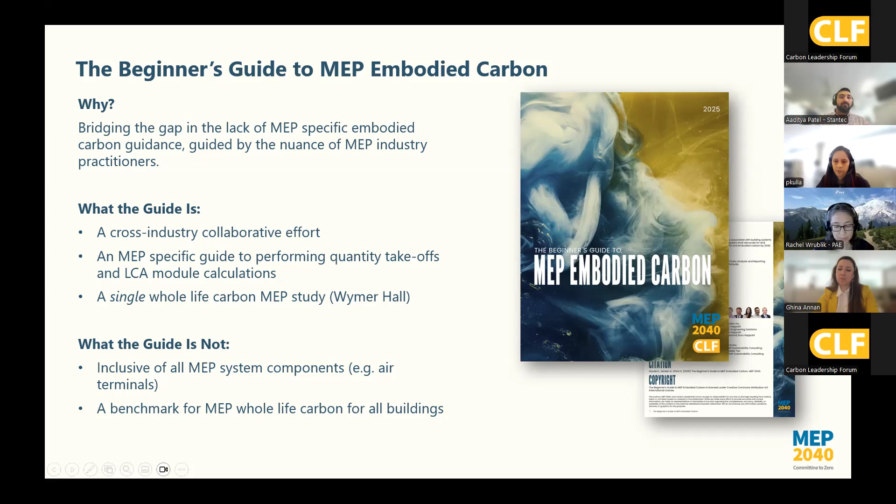Okay, so I'm going to go through the guide briefly on a high level. You can see here all the categories that were included, and then some of the specific pages for those categories. On each of those, we list some of the exclusions. We were really trying to get to that 80-20 to tackle the most important big things that we could.

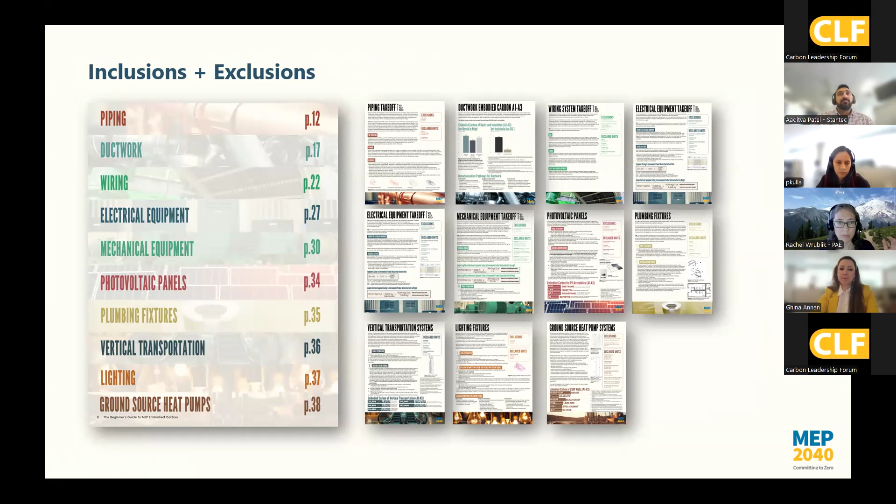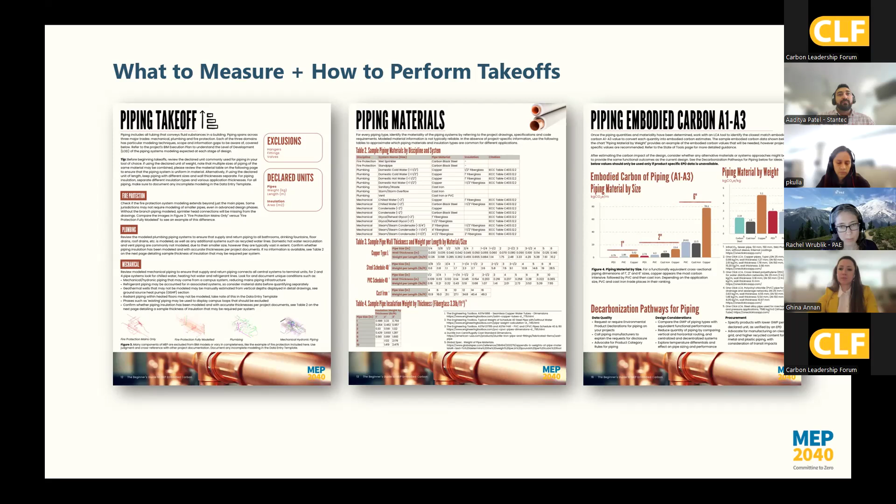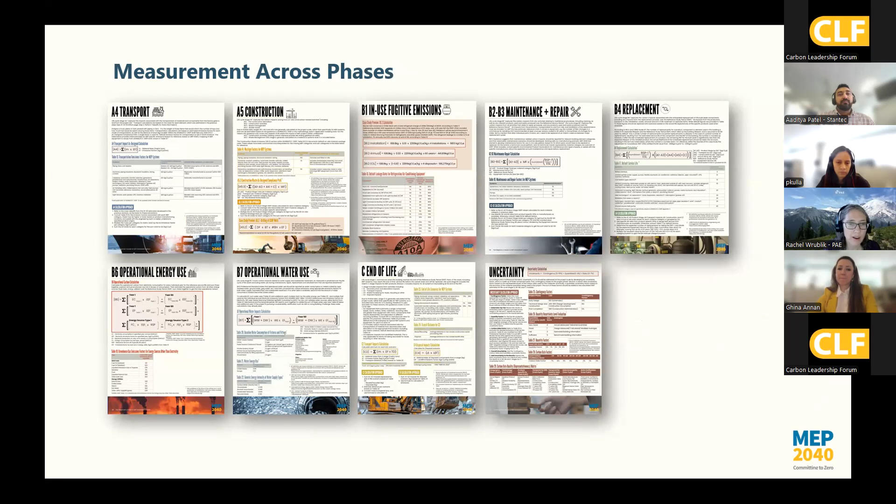And then within the guide, you can see that there is guidance around how to handle the takeoffs, mainly from Revit, and then assign them actual materials and embodied carbon data and handle those calculations. We also go through across the phases and give specific guidance on how to handle each of these. There are some specific exclusions, which are also listed. And then we have our uncertainty calcs at the end.

And as I said, we have one case study that was included in the guide. So here's a high-level picture of what we found out of that Wymer Hall study. When we looked at cradle-to-gate upfront carbon, we saw that MEP accounted for more than a quarter of the emissions, which was much higher than a lot of the initial estimates had been. So this is a little surprising.

When we look at whole life embodied carbon specifically, we see that MEP jumps up to over 50% in this particular case. This is once we're including replacements and fugitive emissions. And then the graph at the far right looks at the entire whole life carbon picture, which includes operational energy and water emissions. And if we lump that into MEP, then we see that it's almost 3/4 of the emissions. So very significant, and it really spoke to us in terms of the need to do something about this and get more data.

Within the guide, there's a number of insight pages. We look at the EPDs that are missing from the industry. We really have a lack of carbon data in MEP. There are call-to-action pages for 4 different audiences. And then we look at the comparative impact of MEP materials, which I want to zoom into here.

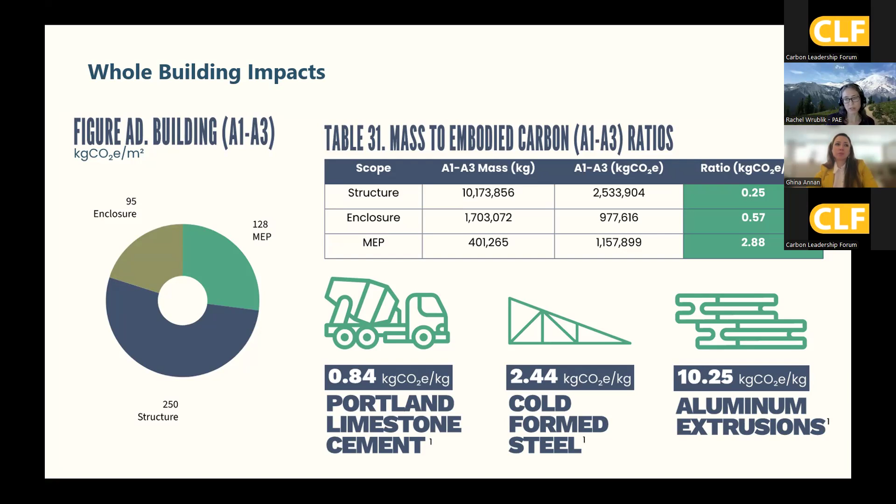And then you can see at the bottom an example of that. The ratio on the right is kind of an average. But if we look at steel or aluminum, these are things that are featured often in MEP, and it shows just how important those material selections can be in overall impacts.

We also talk about environmental product declarations. There's definitely a lack of those in MEP, but that is changing. We're seeing more and more of them. And one thing we saw looking at the whole life carbon picture is that for the case study, we were using more than 60 EPDs to cover MEP systems, which is much more than structure, needing about 5, and envelope, less than 15. So this speaks to the complexity of the systems. There are a lot of nuances to it, and really the importance of trying to get more embodied carbon data.

So we also launched the whole life carbon pilot while the guide was under review. We recognized the void of MEP embodied carbon takeoffs in the industry, and thus embodied carbon data. And so this was a cross-industry collaborative effort by 27 companies. We got 20 individual project studies across varying typologies. And this was a great proving ground for the guide and the methodologies within it.

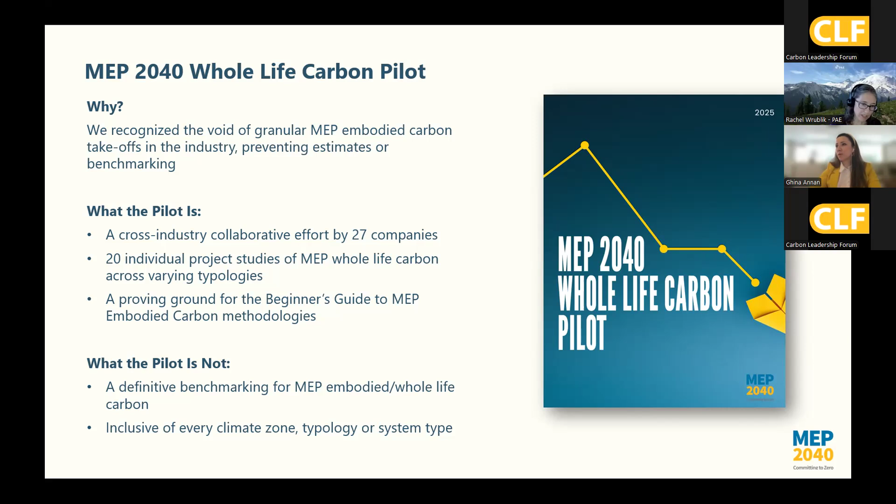And it is not, like I said, a benchmarking study, just like the guide was not. It is that initial data and testing out of the guide. And it's not inclusive of every climate zone or typology or system type. We did the pilot study. We met weekly. It was a great group of organizations that met, volunteered their time to put together these case studies. And you can follow this from our resources page or find us on YouTube.

And so out of these two big initiatives, we have upcoming here the V2 guide. This is set to release Earth Day of this year. Some good updates, mainly coming out of that pilot study, and I'll give a brief overview of that here in a sec. And then the pilot analysis, where we're looking at our findings and doing a gap analysis, which we'll publish probably in May or June. And we will feature these findings in our next quarterly forum. That's May 14th. So I encourage you guys to attend.

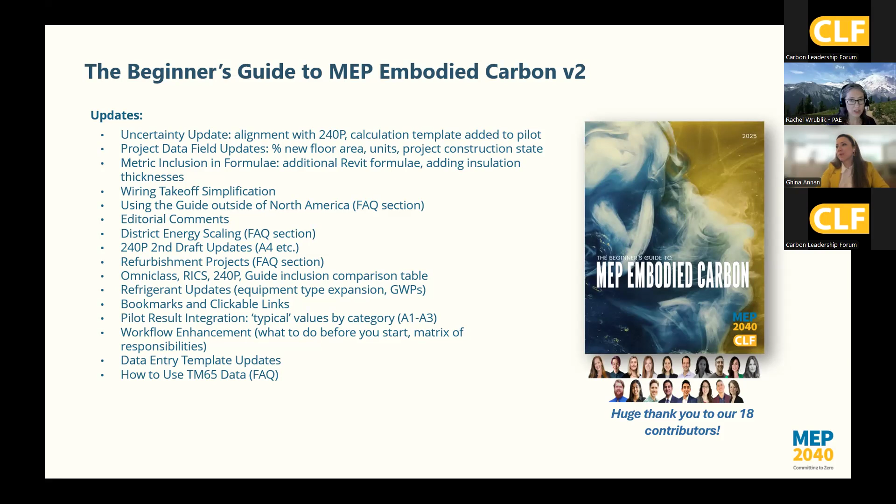And yeah, so as far as the guide 2, these are the highlights. I'd say it's not fully inclusive of everything that's being updated. We are including metric formulas now in the guide. There's a simplification of the wiring takeoff. We updated the uncertainty calculation to align with 240P and added a template to help with that calculation. We have a whole FAQ section that talks about district energy, how to use the guide outside of North America, how to handle refurbishment, and so on. So really excited about this. I think it's all good updates, but the overall structure is the same.

Okay, and then just to close out here, a look back at our timeline where we're at. Really wanted to highlight that while we've had so much to do, and this seems like a very daunting task, we've made a lot of progress in just a few years. ILFI zero carbon certification now requires MEP 2040 participation. There is now a MEP EPD LEED pilot credit for V5, which is pretty exciting. ASHRAE 240P is underway, and there is some talk within the Carbon Leadership Forum to include MEP. So with that, I will turn it over to the Stantec team to give you the results and discuss their pilot study or their case study.

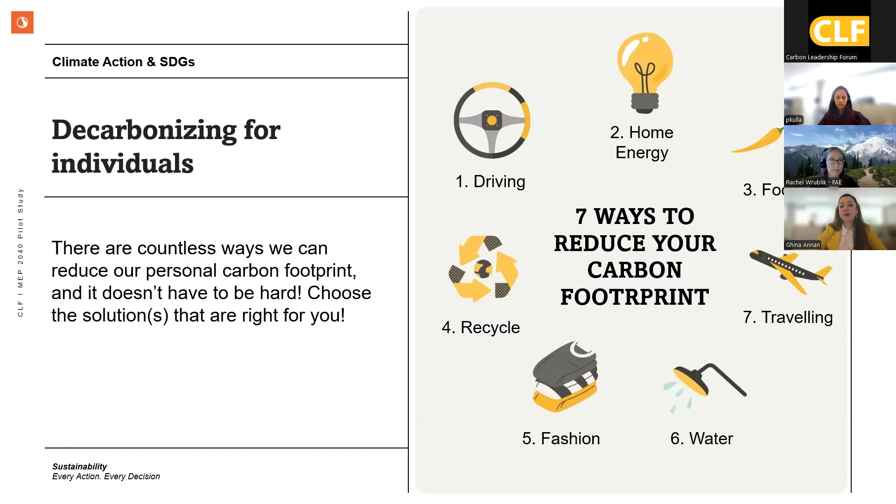Okay, with that, we can quickly introduce ourselves. My name is Ghina Annan, and I'm the Decarbonization Business Lead at Stantec. I'm passionate about bringing in clarity, helping teams and clients make informed decisions around reducing whole life carbon, strengthening resilience, and most importantly, optimizing indoor environmental quality. I work with an amazing team. Aaditya, would you like to introduce yourself?

Yep. Thanks, Ghina. So Aaditya Patel here, Associate Sustainability Consultant and Team Lead based in Ottawa. As Ghina mentioned, we have an amazing team here, and we are all passionate about decarbonization. We work on several building typologies and infrastructure projects, focusing on improving sustainability in whatever aspect of the project. And today we are excited to present this MEP LCA case study. Pass on to Poonam. Hello, good morning, everyone. I'm Poonam Kulla, Sustainability Consultant at Stantec Ottawa office, passionate about sustainability, BIM, and architecture, and excited to present this MEP 2040 healthcare pilot study.

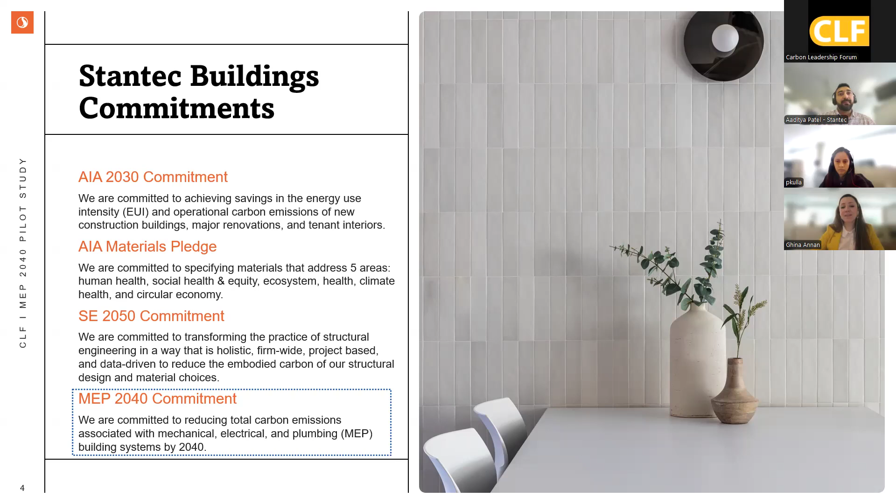We'll jump to the agenda on the next slide and we can tell you more about what we will be covering. So we will start off with a whole life carbon pilot study overview. We also will be speaking about what is life cycle assessment. I know Rachel touched on this in detail, but we'll just go over it quickly. What is the MEP LCA scope, project introduction, the methodology, and then we'll definitely have some exciting slides around the results.

But above and beyond, so we've done this pilot study, but how can we ensure that we're really showcasing that expertise in-house and applying it on other projects? So what we've done is highlighted a lot of challenges, but also the solutions, and we'll tell you more around how we've addressed those across completing this study. Finally, we wanted to ensure that you're all part of this great effort. So we have some call to action, and then we'll open it up for discussion to hear more about your exciting projects. So with that, let's move to the next section, please, Poonam.

One more, please. Okay, so in talking about the MEP Whole Life Carbon Pilot Overview, this is, again, an industry collaboration. It launched in early 2025. It brought in a lot of firms, 35 firms across 40 projects. And the intent was basically to understand the carbon across the full life cycle of MEP systems. And this hasn't been historically well captured. So here there's a lot of value in this great effort.

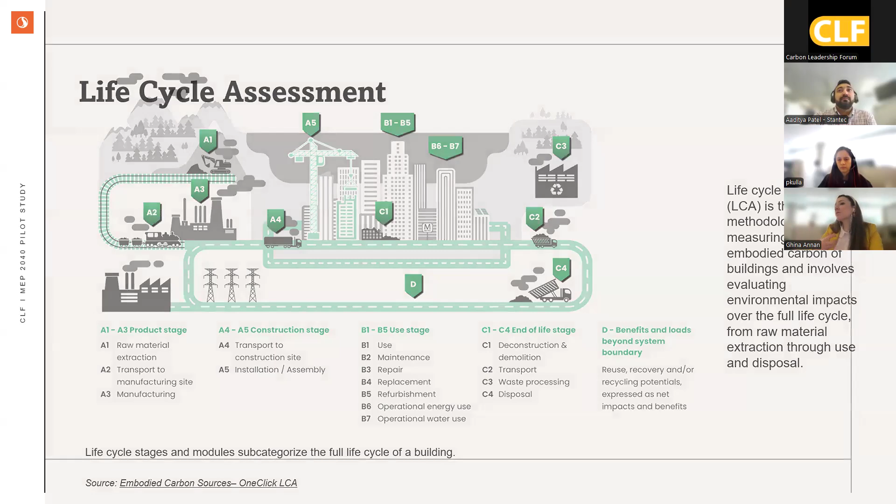And this brings us really to the scope that we have looked at. So for this project, can move to the next slide, our scope covered key life cycle stages that are most relevant to MEP systems. So for transparency, that includes the product stage from A1 to A3, along with the transport A4, and then A5.3 as all highlighted in red, and the waste management under A5, construction and installation.

When we move to the in-use stage, we've included the refrigerant-related fugitive emissions, B1.2, related to maintenance B2, repair B3, and replacement B4, as well as operational energy B6 and water use, which is B7. Finally, we captured the end-of-life impact through the transport of C2 and disposal of C4. So together, this allowed us to capture the impacts A1 through C4, where MEP systems are most significant.

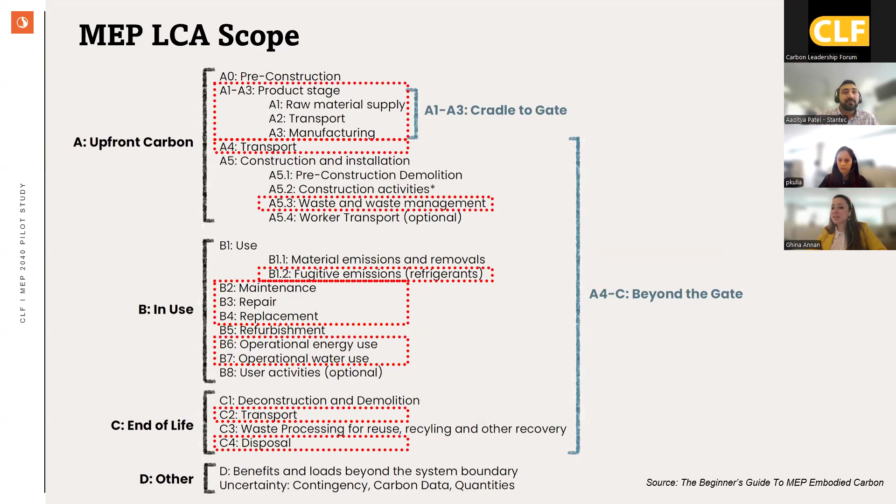And to capture this, we followed the methodology and we worked closely with the Beginner's Guide MEP team. So this is a great reference, which you can download for free from the MEP 2040 website, that would give you a lot of these insights. So for now, we'll let you jump to the exciting project introduction and then results, but I'll pass it over to Aaditya. Thank you.

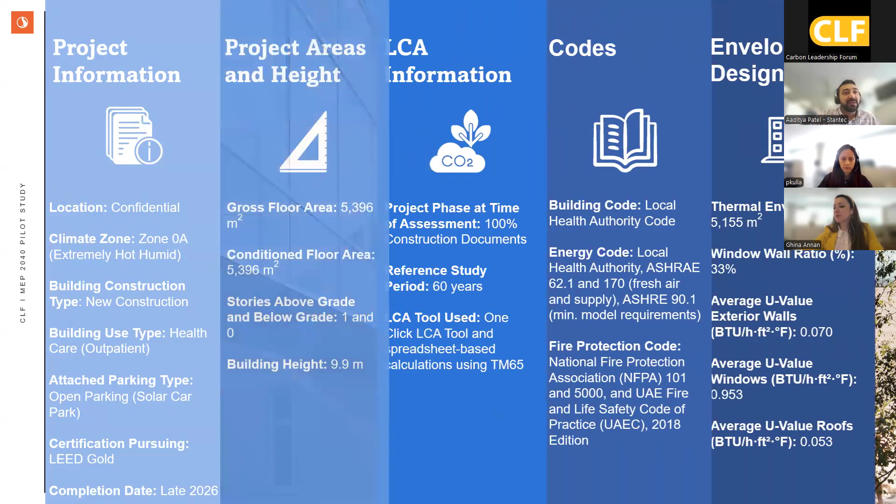This is a new construction healthcare outpatient facility pursuing LEED Gold. It is roughly 5,400 square meters in gross floor area. It's one story above grade with a building height of approximately 10 meters. This assessment was done at 100% construction documentation stage. Again, it's more of an accounting exercise we did on this project to capture the MEP carbon footprint.

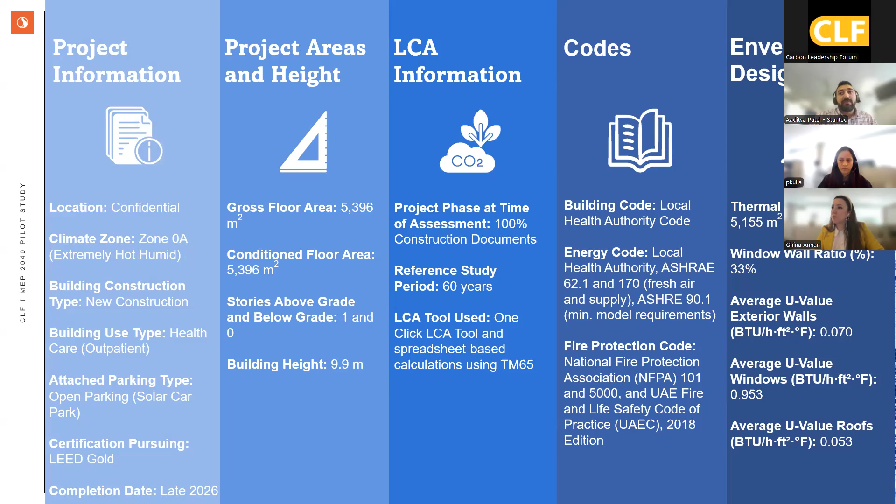But ideally, you would expect such studies to be conducted from early on in the schematic design and moving on through the other design phases. Overall study length was 60 years. The tool we used for conducting this is One Click LCA, supported with spreadsheet-based calculations using TM65. There are several codes, local codes and ASHRAE codes that were referenced for this project. I will not go over the envelope details, but window to wall ratio for this project was 33%.

Yeah, the key things, mechanical systems. So as I mentioned, this building is located in an extremely hot and humid climate zone, so it's cooling dominated. We have 3 air-cooled chillers supplying nearly 1,500 tons of cooling. Heating is provided by electric boilers, just over 100 kilowatts of heating capacity.

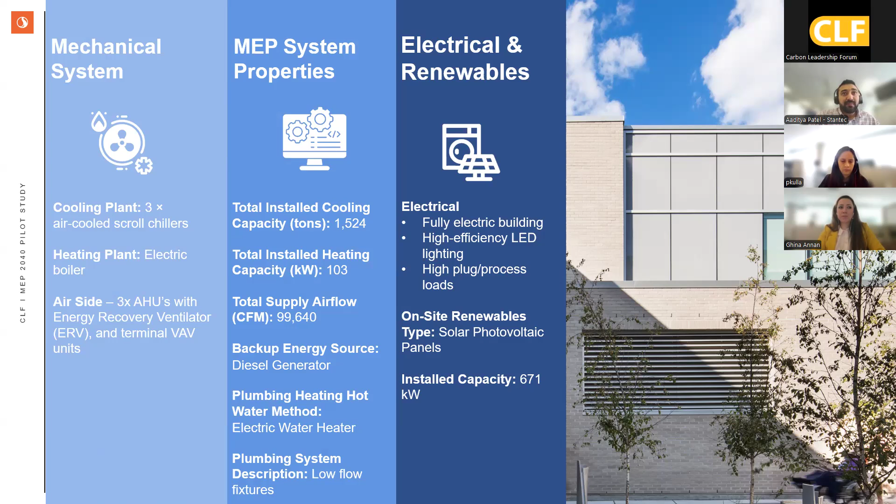For air side, we had 3 AHUs, all having energy recovery ventilators and terminal VAV units, supplying a total of roughly 100,000 CFM. We have a backup diesel generator, electric water heater, and throughout the building, we had low flow fixtures. Another interesting thing to note is this project did have on-site renewables, and we did assess the carbon footprint of that. Yeah, moving on to the methodology.

Next slide. Perfect. So this slide shows how we actually calculate the MEP carbon footprint. So it starts with confirming the level of development. Now, what does this mean? It probably means the BIM execution plan for the project. So we understand what level of detail is modeled in Revit. We coordinate with the design team members to understand how much detail we can extract from the BIM models.

Again, we started this project later, at construction documents, so we had a lot of good information to extract from. If you are starting early, there would be more collaboration required between the design team members to understand what details are being modeled versus what is left out at the schematic design phase and what you need to consider. Next step involves performing takeoffs. So once you establish there's good enough detail in the Revit models, you start doing takeoffs for MEP systems. Again, this is mostly Revit based. Step 3 is something critical, which defines materials and properties.

So takeoffs doesn't mean you have the right information for conducting LCA. You might have piping length but not the material. You might have number of boilers but not the capacity, right? Things which Revit models might not have. You need to refer back to product cut sheets and specifications to establish the mapping between the material and equipment the project uses and their properties.

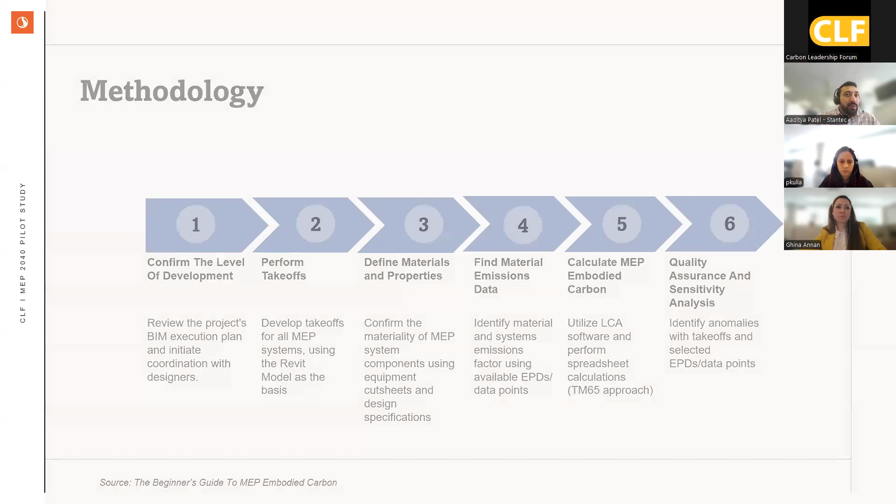It's important to keep in mind that these results are project specific and the embodied carbon intensity can vary for each project depending on factors like building location, system selection, and other design decisions that are unique to each project.

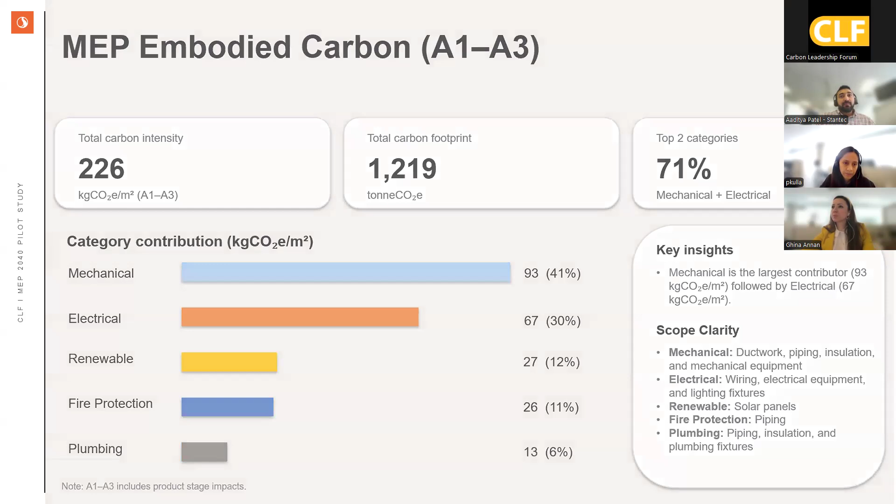Therefore, we can see the total carbon intensity for mechanical is at 93 kilograms CO2 equivalent per square meter for cradle to gate, and the total carbon footprint is at 504 tons CO2 equivalent.

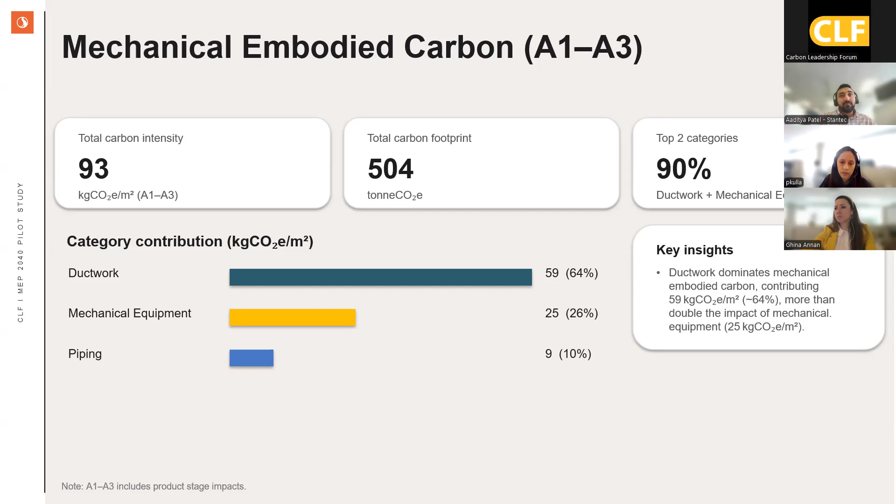And the others, like hot water heaters, chillers, fans, and fan coil units, are also contributing, but not as high as the AHUs or the VAV terminals. So the overall carbon intensity was at 25 kilograms CO2 equivalent per square meter.

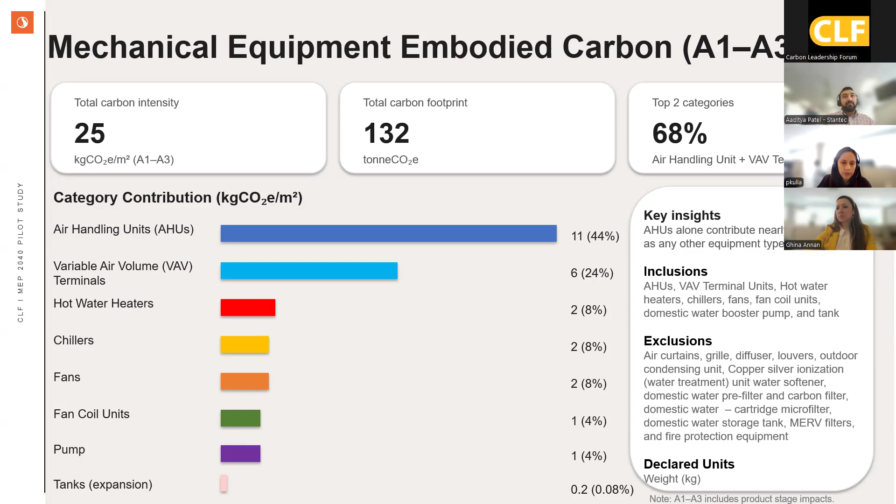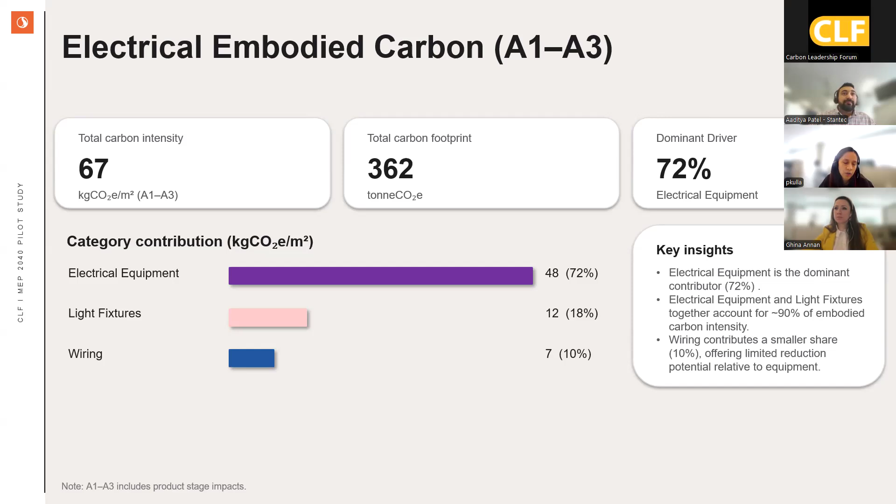Now, looking at the electrical discipline results, based on the category contribution from the bar graph, we can see that electrical equipment has the highest category contribution at 72%, followed by light fixtures. And wiring contributes a smaller share, almost 10%, offering limited reduction. So the total embodied carbon intensity across electrical is at 67 kilograms CO2 equivalent per square meter. In the next slide, we will understand what's driving these numbers, like why electrical equipment has the highest category contribution compared to lighting fixtures and wiring.

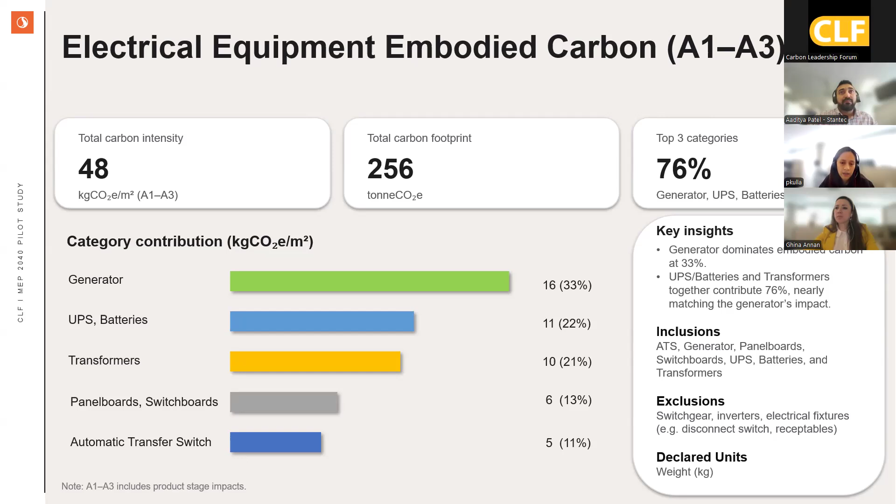So as you can see from the bar graph, the generator dominates the embodied carbon at 33%, followed by UPS and batteries, and then transformers. ATS is the least contributing category. So the total carbon intensity is at 48 kilograms CO2 equivalent per square meter for cradle to gate. And the reason why systems like generators, UPS batteries, and transformers dominate the electrical equipment is because they are material intensive and carry a higher embodied carbon footprint.

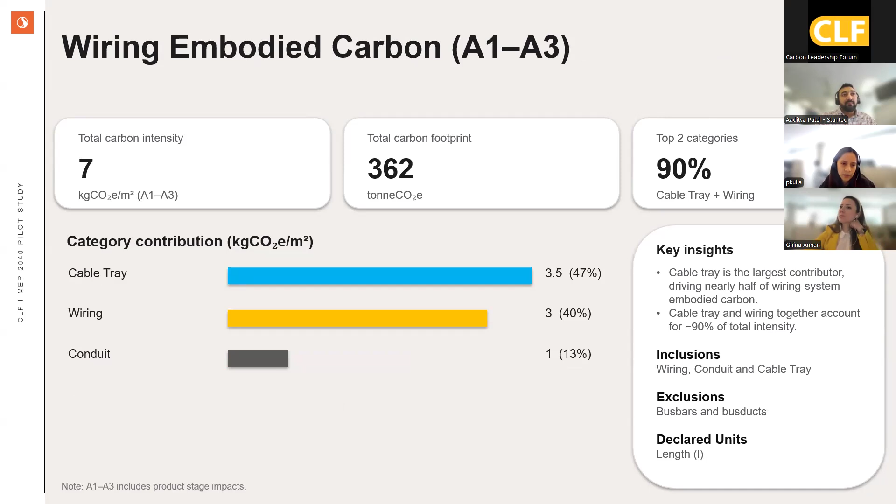So looking at the wiring embodied carbon results, we can see that the cable tray and wiring together account for like 90% of the contributions, where cable tray is at 47%, and the total carbon intensity is at 7 kilograms CO2 equivalent per square meter for A1 to A3 stage.

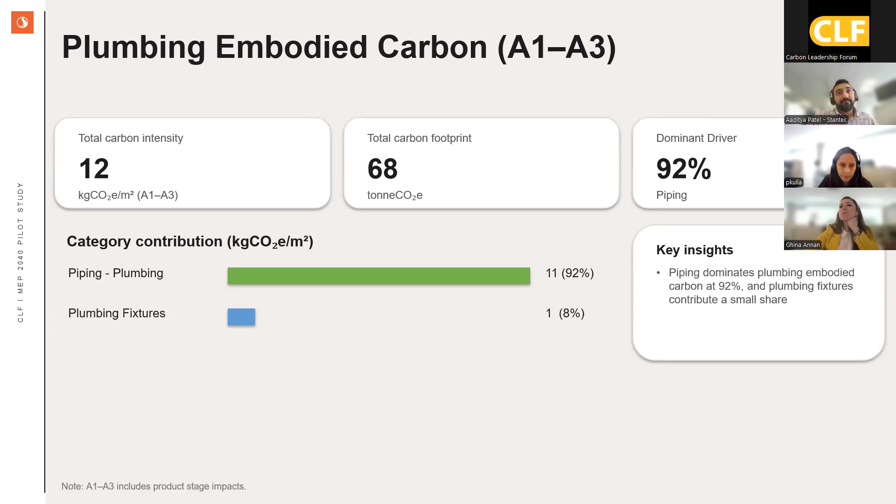So the material for fire protection piping was carbon steel, and for plumbing piping, it was stainless steel and PVC, and same for mechanical, it was stainless steel and PVC.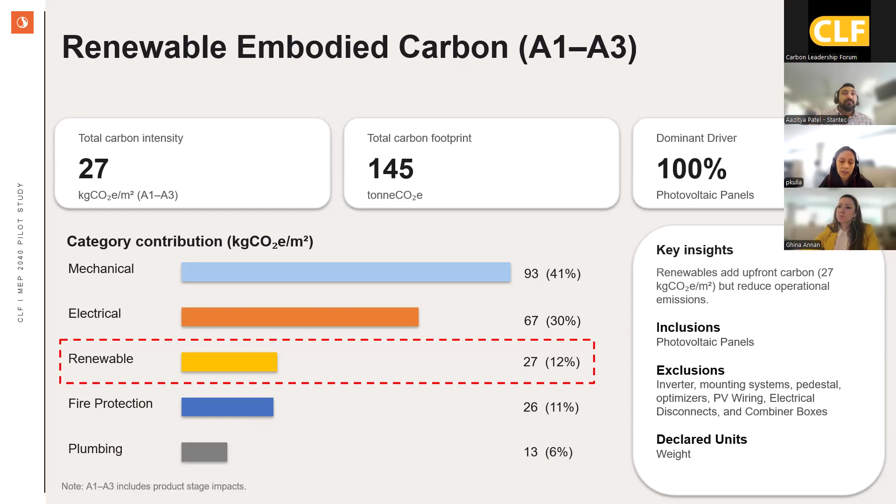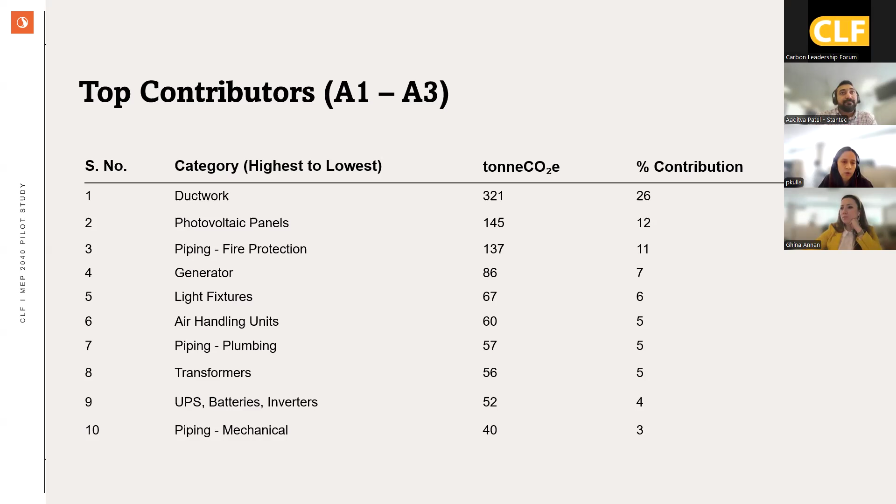So this slide summarizes A1 to A3 results, and we can see the top 10 contributors, with ductwork being the highest at 26% and photovoltaic panels at 12%, followed by fire protection and so on. Yeah, so now I will pass on to Aditya, and he will discuss whole life MEP embodied carbon results. Thank you.

Perfect. Thanks, Poonam, for going over the cradle to gate results. As you can all imagine, each category has its own nuances, takeoffs, and selection of EPDs or data points, and there are several assumptions that go behind them. So again, as we move forward, I'll present the full life cycle stage results from A through C.

So this bar chart is very interesting to see. You can observe that we already covered A1 through A3, right? So it had an intensity of 226 kg of CO2 per meter square. If we look at the full picture, the overall intensity is coming out to be 872 kg of CO2 per meter square. And this is just for MEP, right?

Very, very significant. Now, two things that stand out: refrigerant emissions, which are fugitive emissions happening over the course of the life cycle of the building. As I mentioned, this was a cooling dominated climate. We had a lot of refrigerant use on the project, resulting in very high emissions for that category. I'll go over slides where we cover refrigerants specifically.

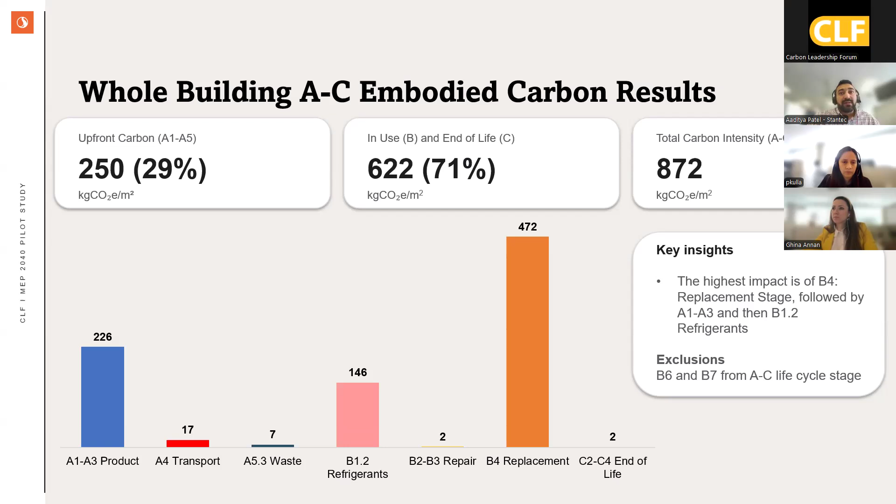Another thing, B4, right, which are replacements. As I mentioned, building services have a lot more frequency of replacements during the life cycle, which results in very high emissions. So you can see that it stands out, 472 kg of CO2 per meter square as its category. So in the next slide, we'll go into why this is happening.

So this chart helps in understanding. Typically, when you do building LCAs, you would have seen that B4 emissions are not as significant, where you only include building structure and envelope. Reason is they're mostly long-lasting elements. They last beyond 60 years or greater than 50 years. Foundation is probably an everlasting component, right?

But as you move inside the building, you would see the service life of materials and equipment reduces. So building services, if you focus on that, it varies from around 10 years to less than 50 years. So depending on the component, it might have multiple cycles during our analysis length, right?

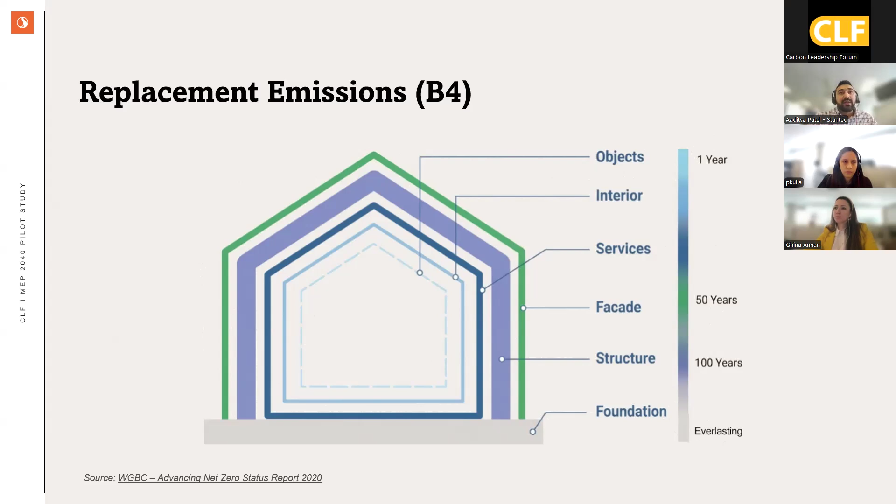So if you move to the next slide, this table captures equipment service life for various building services equipment, and the number of equivalent replacements over 60 years. So as you can see, pumps, inverters, batteries, as much as 5 times during the course of our analysis. AHUs, fan coils, chillers, we had air cooled chillers, right?

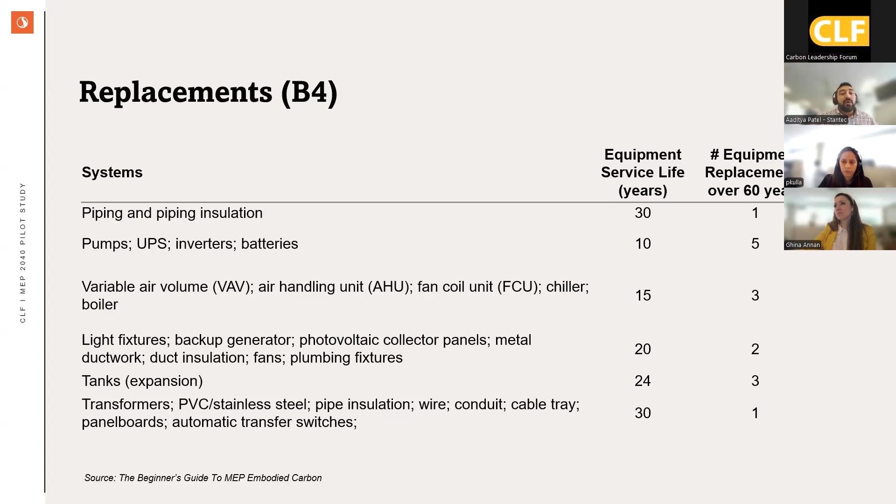Boilers, electric boilers, as much as 3 times. Again, they could vary. I'm not saying replacements are subjective as well, right? These are typical values that were captured. If equipment is made to last longer, those replacements are less, right? And so on. So there are other elements.

Perfect. So refrigerant impact, as I mentioned, this was a very significant contributor. It contributed 17% of A through C emissions with an intensity of 146 kg of CO2 per meter squared. We had two primary refrigerants, R454B, which has a GWP of 466 kg of CO2 per kg, and we had R410, which is a very

high GWP of 2088. Based on the amount which leaks every year, it may be ranging from, I don't know, 1% to 3%, and then end of life and installation leaks, which are also very significant. And on top of that, there are replacements of the equipment, right? So all that contributes to very significant refrigerant emissions occurring over the lifespan of this project.

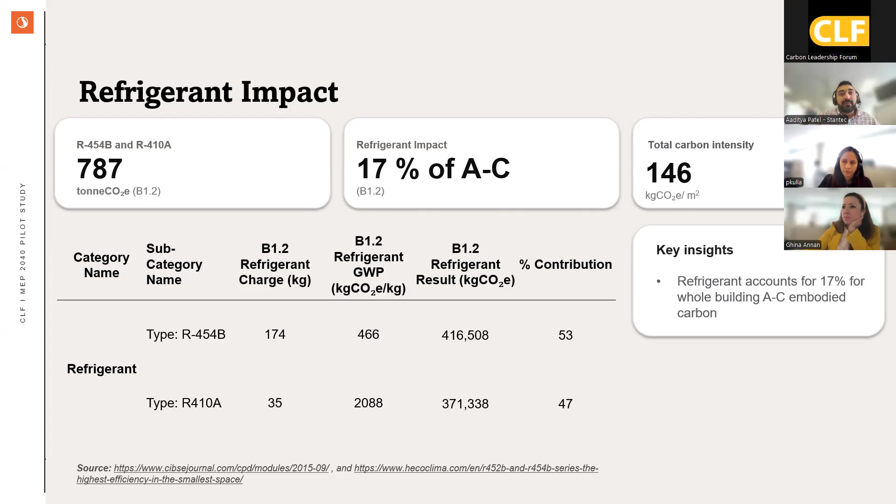So this is interesting. Previously, we showed you the top contributors when we looked at cradle to gate. We had ductwork, PV panels, piping for fire protection, and so on. But if we add A through C, now there's one category which just jumps out. Refrigerant wasn't there. It jumps out to second category. So that's the significant impact refrigerants can have on the building's carbon footprint.

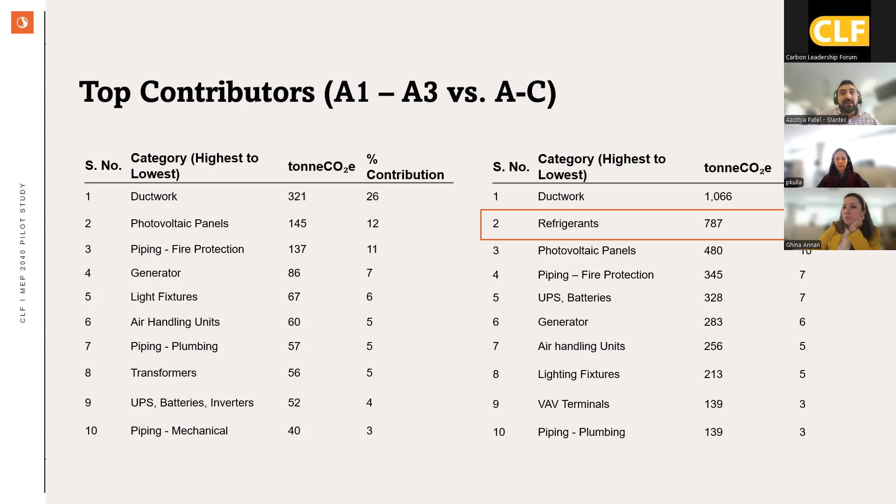And it's very important to have right selections, right? Early stage informing the design on choosing refrigerants which are available, low carbon refrigerants, is critical.

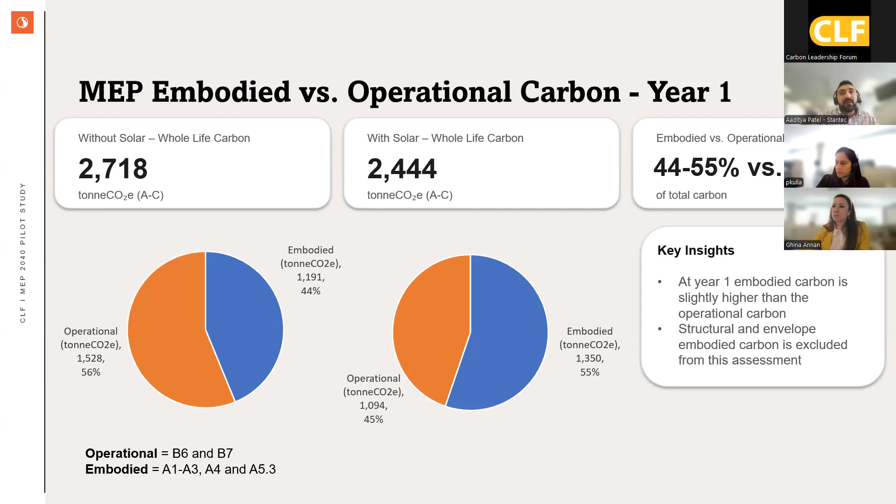Now imagine adding, this is just MEP as I mentioned, adding the structure and enclosure embodied carbon, it will be very significant. The results we are showing here is for year one. So operational emissions, on the next slide, you will see over a 60-year period, they would add up. So probably Poonam, can you move to the next slide?

Yeah, perfect. So here we see those operational emissions. Again, they are the assumptions based on how we have calculated them. But just to show you operational emissions, the project was in a dirtier grid, so that impacts significantly operational emissions. And we have assumed the grid intensity to be fairly consistent throughout the study period, which might not

be true, right? Every jurisdiction now has planned to decarbonize their grid, and over the course of a few decades, we'll start to see those intensities come down. But assuming it's a dirtier grid, it remains fairly consistent for the next several years before actually going down. Operational emission is a significant contributor. It's not to say embodied carbon shouldn't be the focus. It's more so for this particular instance, we have the split. Yeah, moving on.

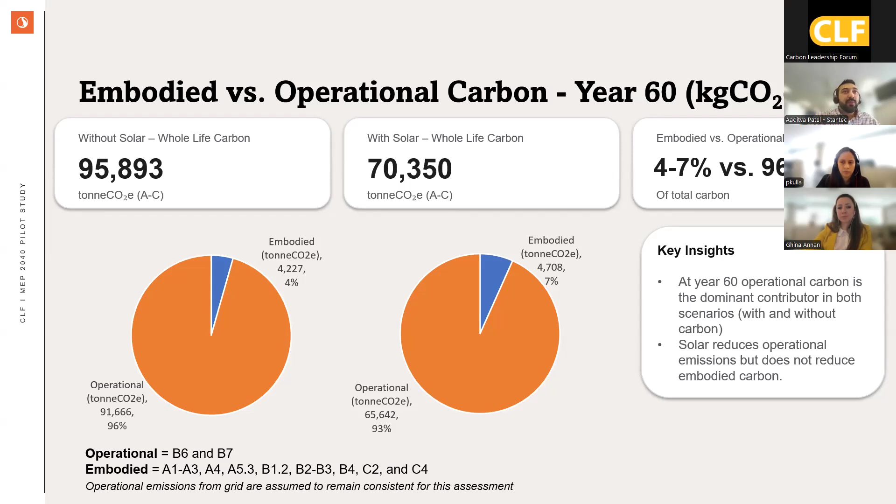So yeah, we had presented the results. A lot of different types of results we have captured: material level breakdown, equipment level, to capturing the full life cycle. And again, as I mentioned throughout the presentation, there were several data gaps we have observed in the Revit model, Revit schedule challenges, limitations.

So not everything is as straightforward as doing takeoffs in Revit and assigning an intensity and calculating the MEP carbon footprint; scope boundary definition, including certain elements versus excluding; limited EPD availability in the market. That's a well-known fact when we are doing an MEP LCA.

So how we went about it, again, it's a very collaborative effort. Designers or the BIM team need to understand what we are trying to extract from the Revit model. We need to be clear in our request as well, what we want, the level of details, and what we are trying to do with that. And where there are schedule limitations, we need to build our own calculation spreadsheets. So there were manual calculations done using spreadsheets.

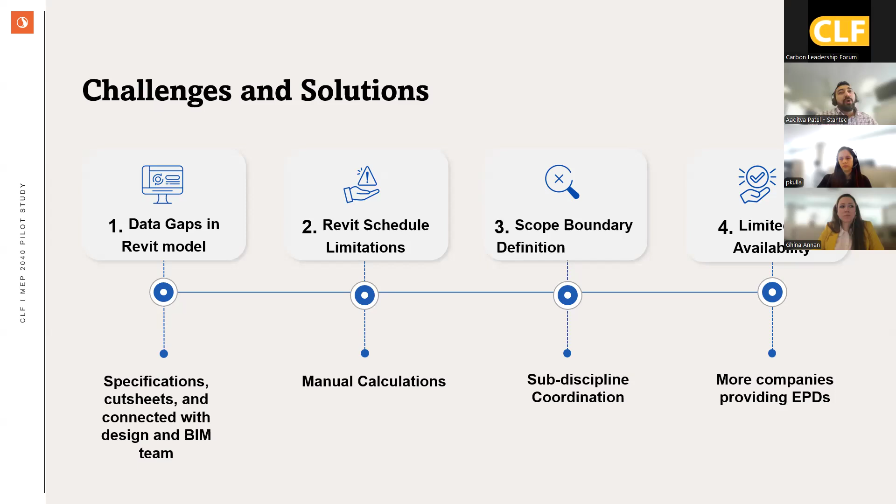Boundary definition is more so a coordination piece, and for limited EPD availability, first, if we don't find an EPD for a particular manufacturer, we actually communicate with them to inform or educate them that this is something industry is looking for, so they are aware. And we are seeing that in the market, suppliers now, even on lunch and learns in our local team here, we observe that they are more and more knowledgeable with these requirements, and they're working towards them. So next slide.